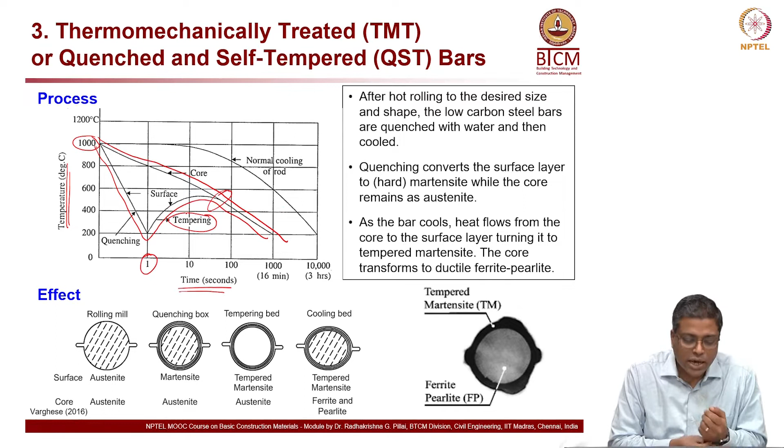And ideally speaking, QST is the correct terminology and not TMT. TMT is a word like Maggi - somebody started calling it Maggi and we all call it Maggi, but actually the correct name of Maggi is noodle. So if you really think about the technical term, QST is the correct term. Somebody in the early time of introducing this type of steel into the market started calling it thermomechanically treated, but if you really think about it, there is no steel which is not thermally or mechanically treated - all steels are thermally or mechanically treated. So it's really not a correct name, but we have to go with what others say, so we'll also join the same way.

But you must remember that it is QST steel, QST.

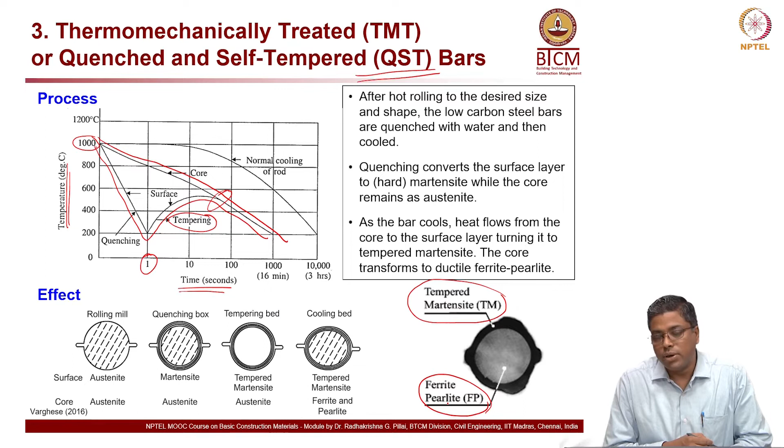Now during this process, quenching and self-tempering leads to a microstructure called tempered martensite for the peripheral region, because that surface is the one which gets water. Now the core region is cooled in a very slow manner, and that forms a microstructure called ferrite pearlite, FP. So tempered martensite on the peripheral region and ferrite pearlite on the core region.

And this color here is not any Photoshop or anything - this is how you will actually see the bar. If you cut the rebar and look at it with your naked eyes, you will actually see this color difference. With some acid treatment, I'll show you that later, but you can actually see this on all the rebars if they are good TMT bars.

Now, what are the advantages of this bar? Low cost, high strength, high ductility. For earthquake resistant regions, you need very ductile rebar. Where is the ductility coming from? It is coming from this part, the ferrite pearlite.

Ductility, this is strength. Tempered martensite contributes heavily for high strength. Ductility contributes for high ductility. Sorry, the ferrite pearlite contributes for the high ductility of the rebar. Okay, so this is essentially a composite rebar.

So if I draw the stress strain graph of this ferrite pearlite and tempered martensite, I'll see something like this, and then something like this, and then this is the TMT bar. So this is for FP, this is for tempered martensite, this is for TMT bar. The center one is like a composite, like the composite bar, rebar curve.

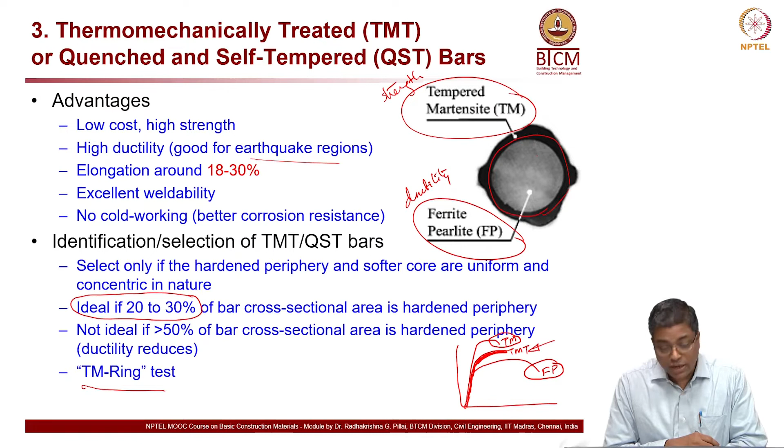So there is a test which is a very good test. We call it the TM ring test, tempered martensite ring. You can see this bar here. There is a ring, you can call this as a ring. So we call it the TM ring test, and this is how a bar will look like.

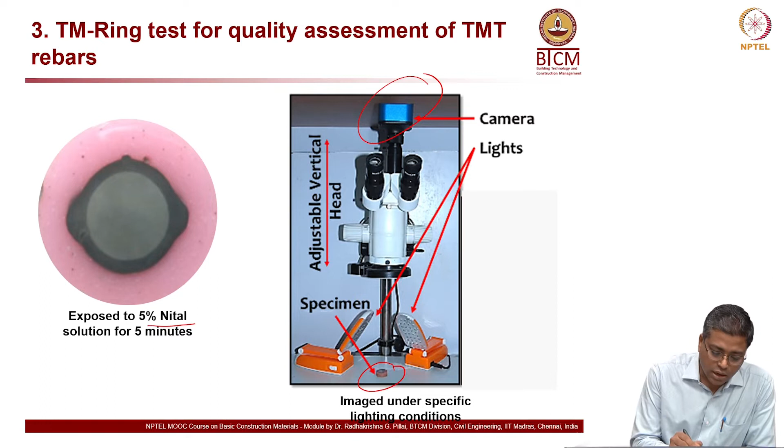So all you need is a 5% Nital solution. Nital is nitric acid plus ethanol. Nitric acid plus ethanol, and you just make, this is the test.

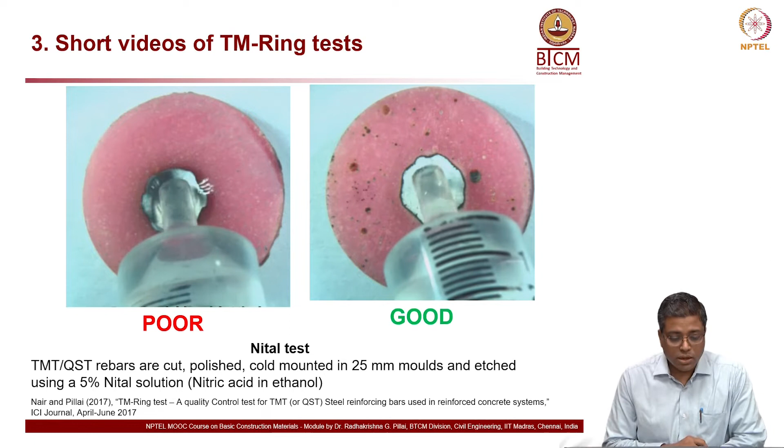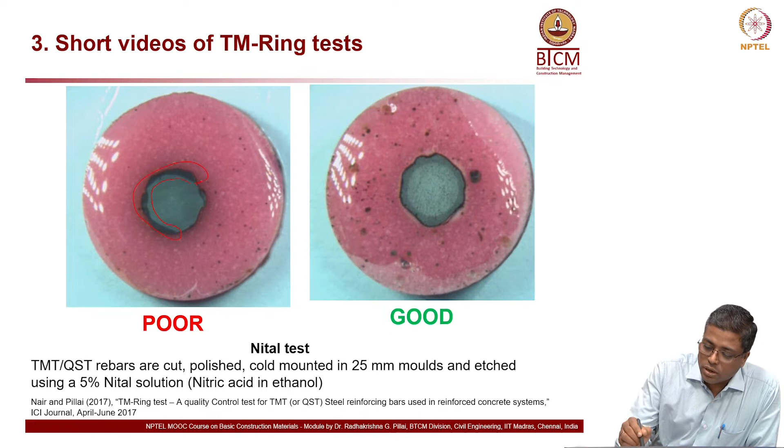You can see the video. The one on the left side is a poor quality bar. The one on the right side is a good quality rebar. And then on the left side, you will start seeing that the ring formation is very bad, but on the right side you can see a full ring formation. You can see here on the left side it's incomplete, no? But on the right side you have a full ring. So left side is a bad quality rebar, right side is a good quality rebar. You can very clearly see that in the ring test.

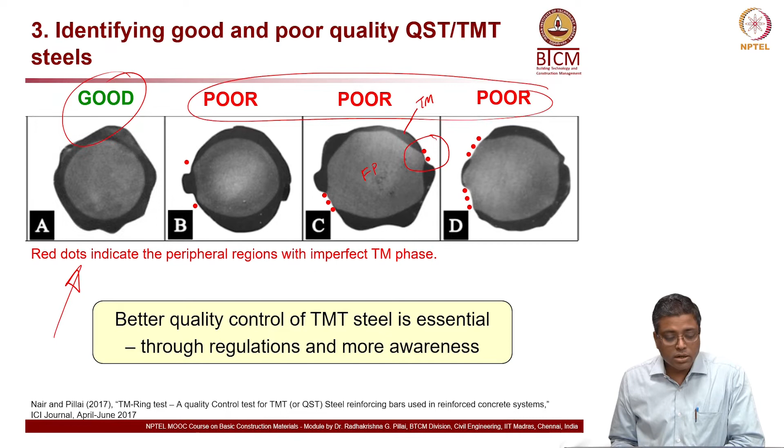Why this is happening is because the steel manufacturers sometimes don't quench the steel properly. If uniform quenching is happening, then you will get a bar like this, the one on the left side, good quality bar with full ring, very good quality, in terms of corrosion resistance also. Now you see here, only type A is good in this.

All others have incomplete or inappropriate rings, not consistent, sometimes disconnected. You can see everywhere here, they're disconnected, not uniform thickness. So all these problems, in a photograph they might look good, but they're not actually good. They look like flowers in some cases, but they are not actually good quality rebar.

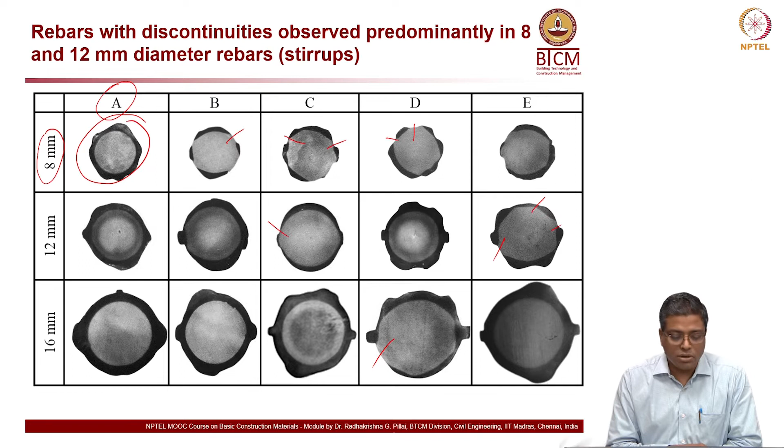Because what you should do is test the bar with the same diameter which we are using, not a different diameter. The ring test should be done on the same diameter rebar, and you should look for the proper ring. If you don't have a proper ring, you will have a lot of cracks like this when you bend the bar.

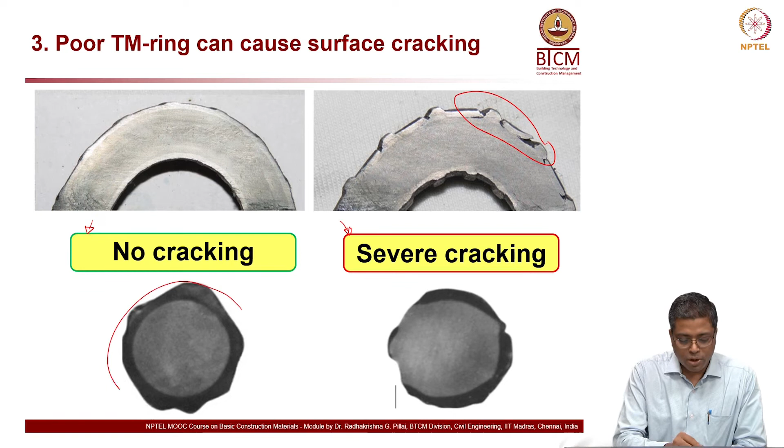And on the site, we always bend the rebars, right? We always have to bend the rebars. And when you bend the rebar, the cracking should not happen. So the picture on the left side is a good quality bar. I put this in green and the bad one in red. So a good quality bar, with a proper ring, even if you bend it, there will be no cracks. On the right side, a bad quality rebar, when you bend it, there will be a lot of peeling off of the peripheral region, which is very dangerous for the structure.

This is, I think, one of the reasons why a lot of new construction starts corroding faster. Because if this kind of cracks are happening, you don't need chlorides, nothing. Only water and oxygen is essential. That is all what is required to cause corrosion, because the mechanism of corrosion is called crevice corrosion. This is what is going to happen if you use this kind of bars.

So you must do this TM ring test on all the bars which you get, as a representative test. Now we bend the bars at the site, and while bending, this kind of crack should not happen. Why do we use this bar? We use this bar for getting ductile performance for our structures. That is why we use TMT bars.

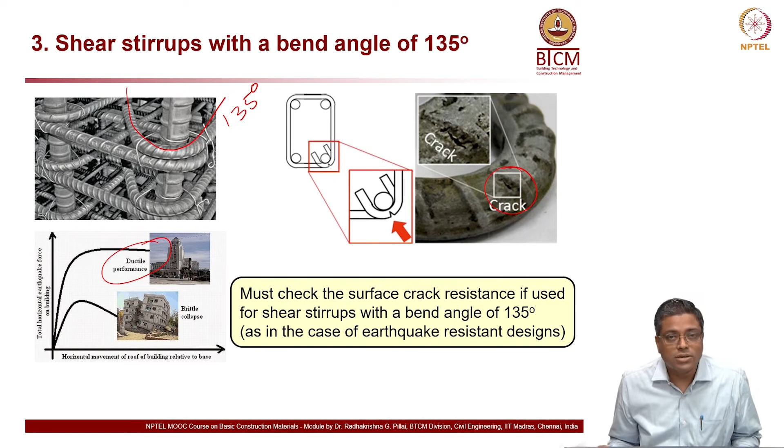The core region is more ductile, I told you, ferrite pearlite is more ductile. The peripheral region gives you the strength, which is tempered martensite. So ductility is the key thing here. And for achieving ductility, we always bend these bars by 135 degrees. So when you bend it like that, the bar should not crack. Like I showed in the previous picture, if you bend it like this, the bar will not crack if the ring is proper. If the ring is inadequate, it will crack.

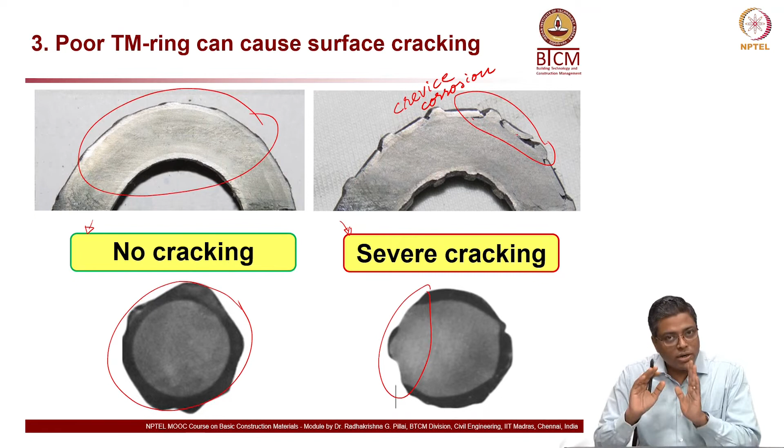Now, another type of rebar is corrosion resistant steel, which is made essentially by addition of a little bit of copper and chromium and a little more phosphorus. These are the three additional ingredients for the steel, and then you get this rebar called corrosion resistant steel. Here one important thing I would like to mention is that you should test the chloride threshold of this steel.

Because if you look at the durability or service life of the structures, it is the chloride threshold which is more important than corrosion rate. Why I am saying this is, most manufacturers, when they sell this corrosion resistant steel, they will say that corrosion rate is low. But that's not the key parameter to look at when we look at long service life of the structures. There is a more important parameter, which is chloride threshold, or even pH threshold if you look at carbonation. So chloride threshold is the parameter which you should look at.

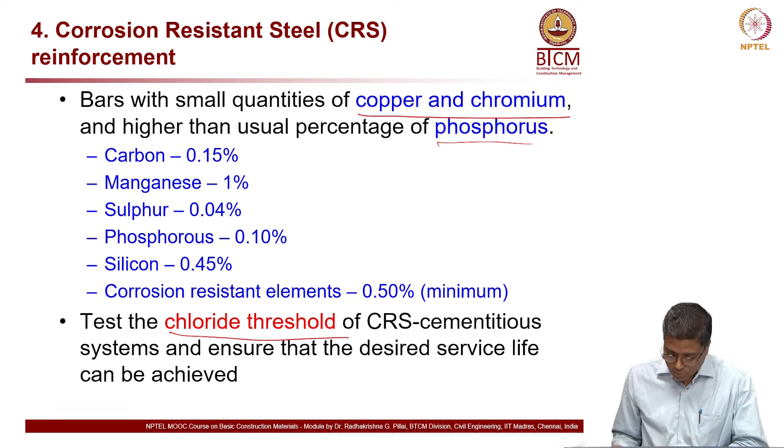What is chloride threshold? It is the minimum amount of chloride which is required to cause corrosion. We'll just leave it at that level, you don't need to go too detailed.

Now, stainless steel is another type of rebar which is also getting more and more popularity. What is stainless steel? 11% of chromium plus nickel and molybdenum, if they have, then we kind of call it stainless steel. Now, passive film is the main oxide layer, mainly chromium oxide, because you have a lot of chromium present in the stainless steel.

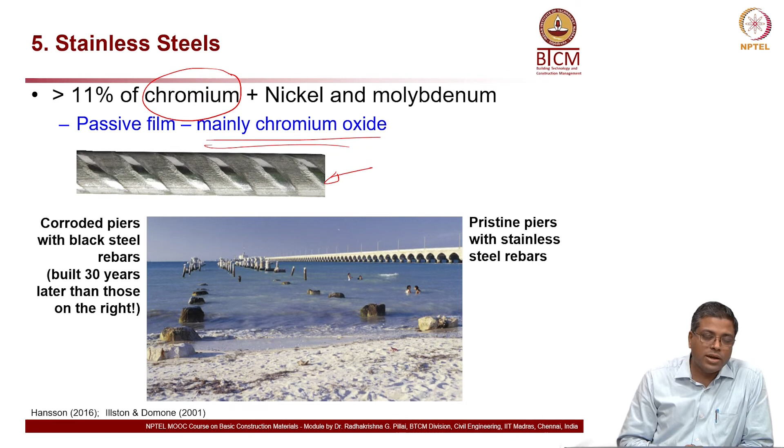Now, this picture below is an example photograph of stainless steel. Looks shiny, bright gray color. The picture on the bottom line will tell you very clearly how important or how good or useful the stainless steel is. You can see these pillars here, they actually belong to a bridge which was constructed after the bridge on the right side.

So, corroded piers with black steel. Black steel is the conventional steel rebar. These piers are all corroded, but this bridge was constructed 30 years later than those on the right, which is a bridge with stainless steel rebar. So, in the same marine environment with chloride rich seawater, when you use stainless steel, it does not corrode.

So it has a very high chloride threshold than regular steel. What is chloride threshold? It's the amount of chloride which is required to initiate corrosion of the steel. For stainless steel, you need much more chlorides than regular steel. Let me write that terminology here: chloride threshold is very high for SS, or stainless steel.

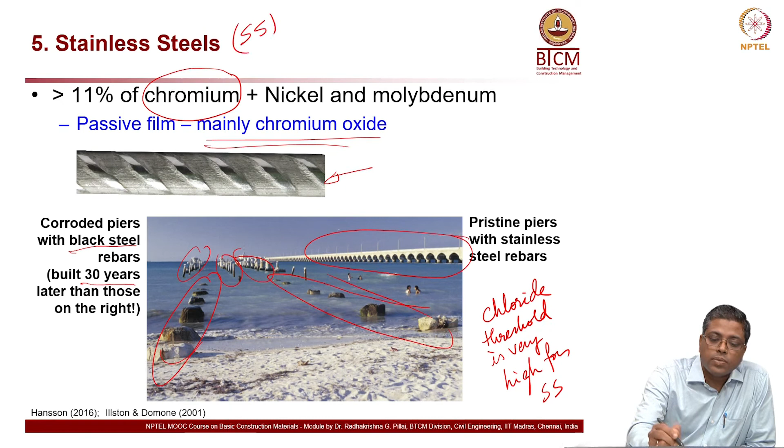Now, what are stainless steels? They are alloys that contain at least 12% chromium. Other alloys such as nickel and molybdenum are also present. The passive film has a significant quantity of chromium oxide in it, and that provides the corrosion resistance. But the cost is a little bit higher, 6 to 7 times more than typical steel.

But we have to see, it's not the capital cost we have to worry about, we have to think about the life cycle cost. So if you want a very long service life for the structure, and in an aggressive environment, probably stainless steel is the way to go. But you have to do this cost analysis, life cycle cost analysis, and only then make that choice.

And also, there are some cases where people say you can use some portion of stainless steel and some other portion of normal steel, for the more vulnerable locations in a structure, like very near to the surface of the concrete you can use stainless steel, something like that.

So in that case, we have to look for something called galvanic corrosion. Galvanic corrosion is nothing but when you put two metals together, one metal will corrode in preference to the other, or before the other, when they are in direct contact. You might see this at home too.

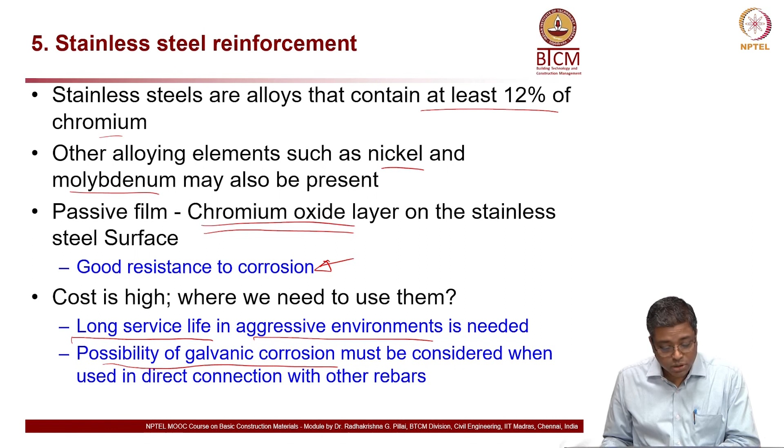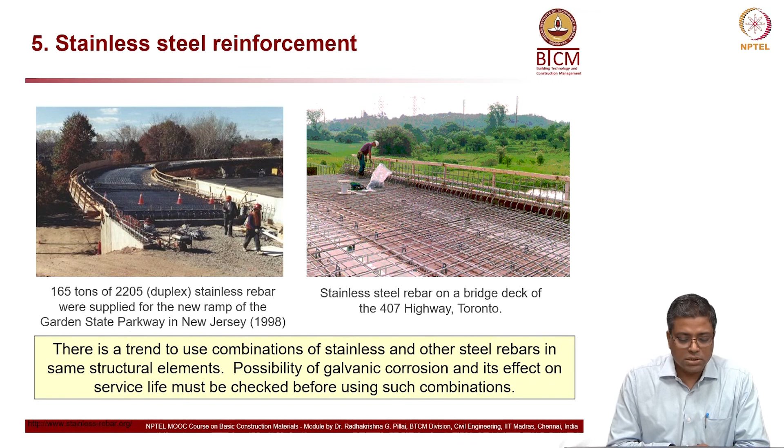They spray chloride solution onto the road surface to melt the ice so that vehicles can drive. But unfortunately, we don't have that problem in most parts of our country. So we still have to see where we need stainless steel rebars, what are the types of structures where we will require them.

Now, to summarize today's lecture: we looked at the history of steel rebars, then we talked about plain and ribbed rebars, then CTD rebars, then TMT and QST steel rebars, then corrosion resistant steel and stainless steel.